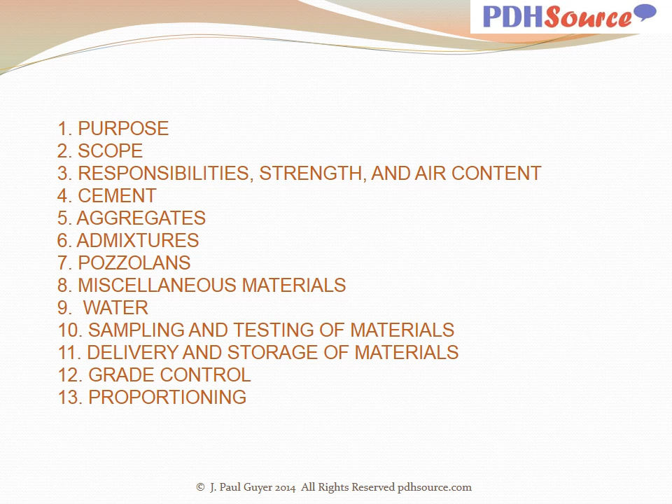11, Delivery and Storage of Materials. 12, Grade Control. 13, Proportioning. 14, Subgrade Base Forms and String Lines. 15, Batching and Mixing. 16, Placing. 17, Field Test Specimens. 18, Finishing.

19, Curing. 20, Grade and Surface Smoothness Requirements. 21, Tolerances in Pavement Thickness. 22, Repairs of Defective Pavement Slabs. 23, Joints. 24, Pavement Protection. 25, Measurements and References.

So as you can see from the table of contents, this discussion provides information on the materials and construction procedures for concrete pavements. We are talking only about concrete pavements, not concrete structures. This discussion describes the constituents to be used in concrete, procedures to be used in manufacturing the concrete, and the equipment and procedures to place, texture, and cure concrete for pavements.

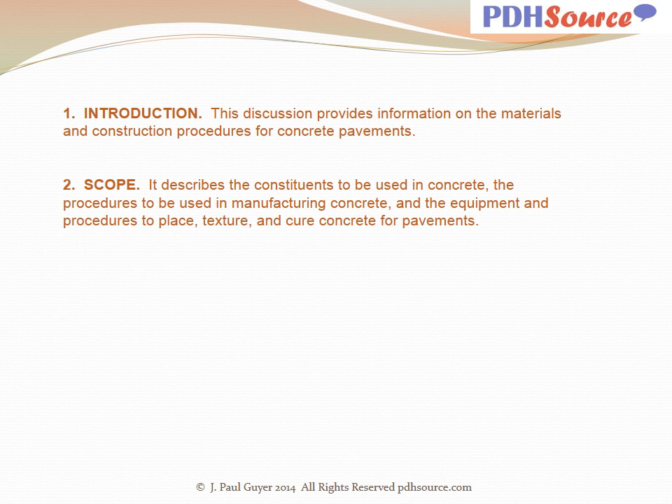Responsibilities are very important in concrete work. The strength of the concrete is, of course, dependent upon the components of the concrete, and the air content is part of the design.

The responsibility for mixture proportioning must be clearly assigned to either the contractor or what is called in this discussion the contracting officer. Now, the term contracting officer is used here to indicate the owner's agent on the project, speaking for the owner.

And in the real world, he may have other names such as project engineer, field engineer, inspector, etc. In this discussion, the term contracting officer is used to mean the owner's representative on the project, and that's how he would be referred to in the contract documents.

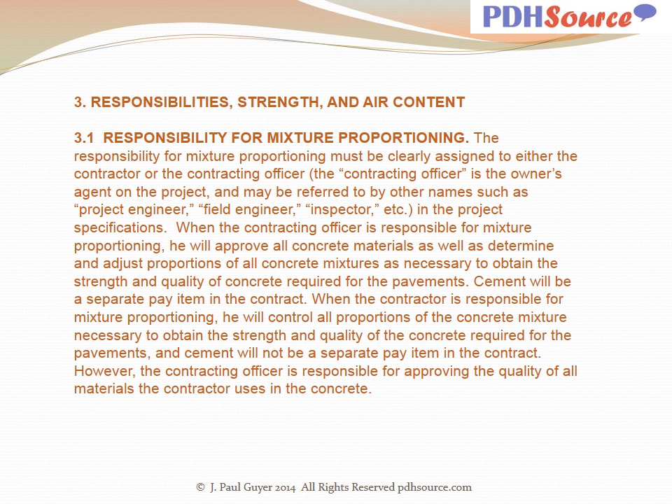The contractor, as part of the approval process, must submit proposed mixtures if he is responsible for mixture proportioning, samples of all materials, and detailed descriptions of all plant, construction equipment, and proposed construction procedures prior to the start of construction.

Flexural strength of the concrete is critically important. Structural designs are based on flexural strengths that the concrete is expected to obtain at typically 28 days for road and highway pavements and 90 days for airfield pavements.

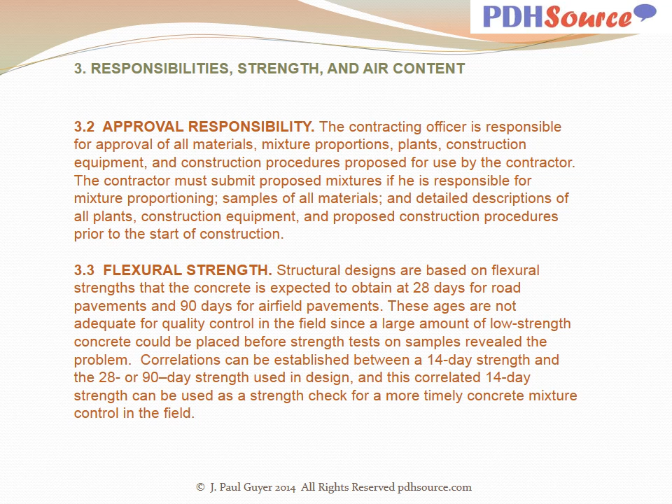These ages are not adequate for quality control in the field, since a large amount of low-strength concrete could be placed before strength tests on samples revealed the problem. Correlations can be established between a 14-day strength and the 28 or 90-day strength used in the design, and this correlated 14-day strength can be used as a strength check for more timely concrete mixture control in the field.

Materials and flexural strength are critical items in the concrete. To select suitable flexural strengths for the design of pavements and for inclusion in contract specifications, the contracting officer should have reliable information regarding flexural strengths obtainable with acceptable concrete materials which are available in the vicinity of the project, and the availability of materials in the vicinity of a project is an important consideration.

Typical design values for flexural strength of paving quality concrete vary from 500 to 750 pounds per square inch. Numerous tests indicate considerable variation in the flexural strength of concrete when different aggregates or different cements are used. There are some indications that aggregate shape and modulus of elasticity are relatively more important in concrete flexural strength than in compressive strength. Also, after optimum flexural strength is reached, there usually is little increase in strength, even with a large increase in cement content.

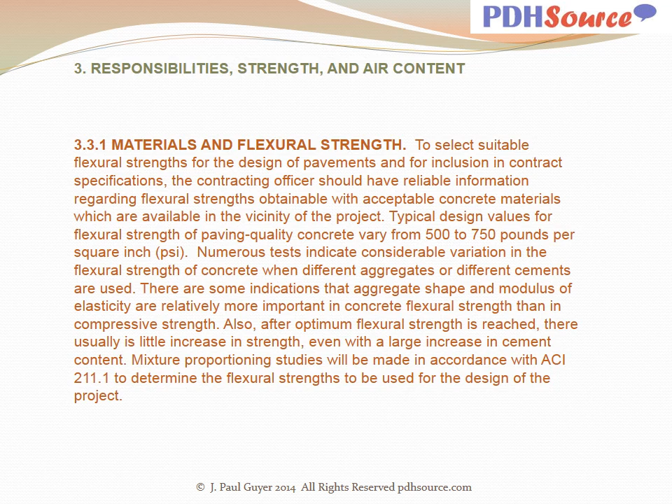The water-cement ratio, strength relations for mixture proportioning in ACI 211.1 are given in terms of compressive strength. Table 1 gives some approximate guidance for relating the concrete modulus of rupture to the compressive strength water-cement ratio relationships given in ACI 211.1.

All aggregates, cementitious materials, and admixtures used in the mixture proportioning studies shall be representative of materials available for use in pavement construction. In selecting a flexural strength for pavement design, suitable allowances will be made for variations in strength indicated by tests of different combinations of aggregate and cement. Pavement design will be based on a realistic and economical strength obtainable with available materials.

Table 1 provides a picture of the approximate relationship between water-cement ratio and strengths of concrete, modified from ACI 211.1. As an example, at 28 days, a compressive strength of 6,000 psi gives an approximate range of modulus of rupture of 700 to 800 psi, while a compressive strength of 2,000 psi gives an approximate range of modulus of rupture of 350 to 450 psi, with the water-cement ratios for air-entrained and non-air-entrained concrete indicated in the last two columns.

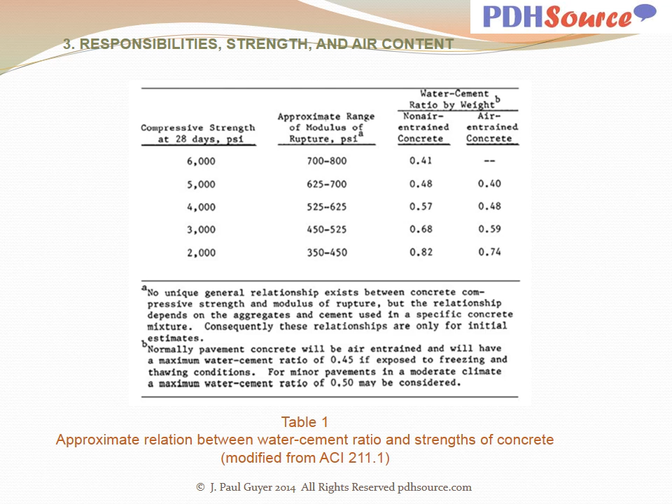Selection of a field control strength is important. Once a mixture proportion is selected to provide the required design flexural strength at 28 or 90 days and a correlated 14-day strength is developed from laboratory testing, a field control strength is selected such that 80% of the consecutive 14-day flexural strength test results fall above it.

The 14-day field control strength is determined from the formula F sub FC, field control, equals F correlated minus 0.84 SD. F sub FC is the 14-day field control flexural strength. F correlated is the 14-day flexural strength that is correlated with the required 28 or 90-day strength. And SD is the standard deviation of flexural strength results.

If sufficient test results are not available to establish a reasonable standard deviation in the mixture, the coefficient of variation, that is the standard deviation of the mixture flexural strength divided by the mean mixture flexural strength, may be estimated as 10% for large projects with good quality control and 15 to 20% for smaller jobs or jobs with relatively poor quality control.

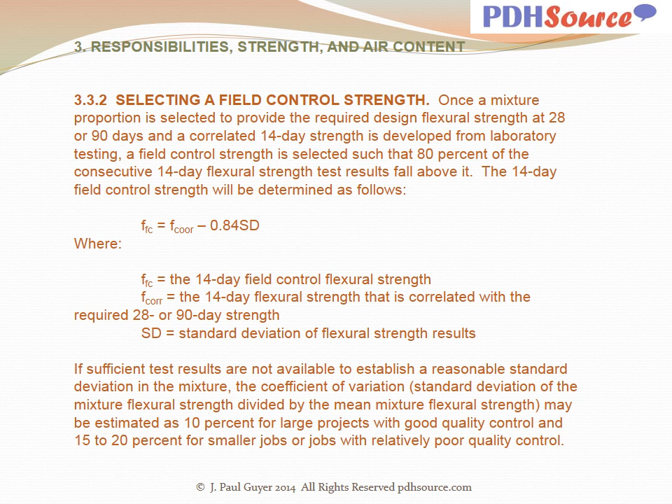Test specimens are an important tool in the concrete pavement construction process. Flexural strength tests should be made on molded beam specimens with 6-inch by 6-inch cross-sectional dimensions in accordance with ASTM C78. Standardization of the test specimen is necessary because of the variations in flexural strength obtained with specimens of different sizes. The 6-inch by 6-inch molded beam specimen must be used for all flexural strength determinations in both the laboratory and the field.

Air content is, of course, one of the components of concrete. The effects of air entrainment must be taken into consideration. Air-entrained concrete is required for all concrete pavements. Air entrainment improves the workability and placing characteristics of freshly mixed concrete and is required for the freezing and thawing resistance of hardened concrete.

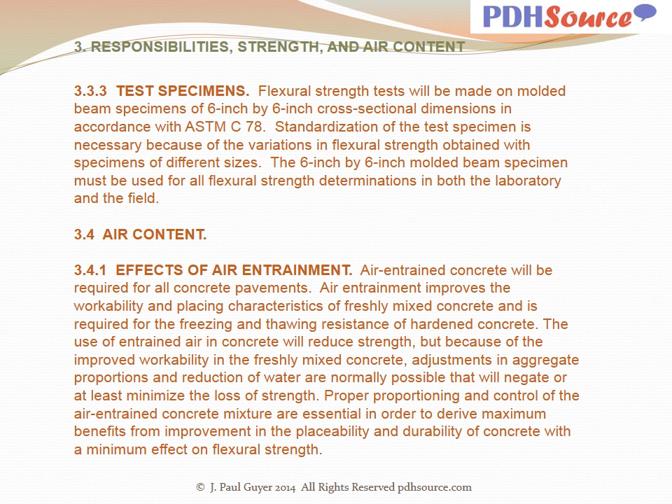The percentage of air content is of importance in the concrete pavement construction process. The specified air content shall be 6 plus or minus 1.5% for concrete pavements located in regions where resistance to freezing and thawing is a prime consideration, and will be 5 plus or minus 1.5% for concrete pavements located in regions where frost action is not a factor and air entrainment is used primarily to improve the workability and placeability of freshly mixed concrete.

Air content must be controlled in the field at the point within the specified range most appropriate for local conditions depending upon the severity of exposure and the quality and maximum size of aggregate. If slag aggregate is used, the air content shall be determined by the volumetric method described in ASTM C173.

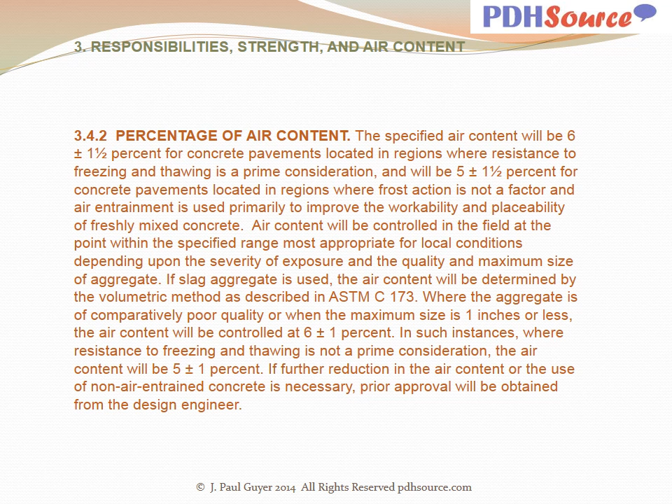Cement content in the concrete is, of course, essential. Either the contractor or the contracting officer may be responsible, in accordance with the contract documents, for mixture proportioning.

When the contractor is responsible for mixture proportioning, no separate payment will be made for cement. When the contracting officer is responsible for mixture proportioning, no limits for the quantity of cement content will be included in the contract specifications. The quantity of cement used per cubic yard of concrete will be determined by the contracting officer, and the cement will be paid for under a separate unit cost bid item.

When the concrete proposed for use on a paving project has a cement content of less than 470 pounds per cubic yard, prior approval must be obtained from the design engineer. When concrete proportioning is the responsibility of the contractor and the cement content is less than 470 pounds per cubic yard, the results shall be verified by 2 commercial laboratories prior to submittal.

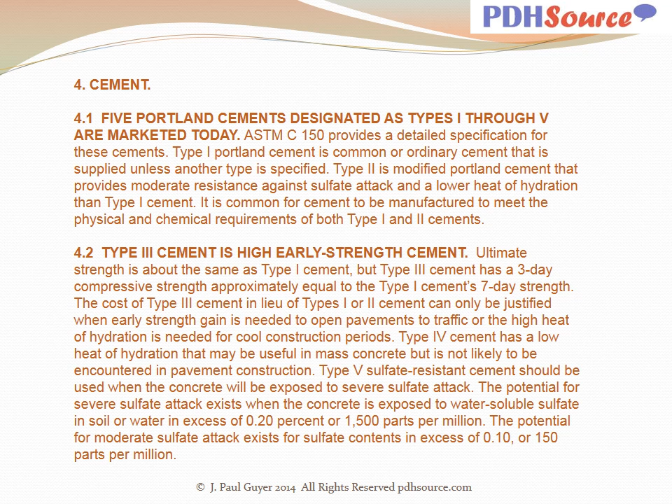Type 4 cement has a low heat of hydration that may be useful in mass concrete, but is not likely to be encountered in pavement construction. Type 5 sulfate resistant cement should be used when the concrete will be exposed to severe sulfate attack. The potential for severe sulfate attack exists when the concrete is exposed to water-soluble sulfate in soil or in water in excess of 0.2% or 1,500 parts per million. The potential for moderate sulfate attack exists for sulfate contents in excess of 0.1% or 150 parts per million.

High alumina cement, known as aluminous or calcium aluminate cement, gains most of its strength in 1 day, has a high exotherm, is resistant to chemical attack, and is a refractory material. When exposed to warm, moist conditions, it will undergo a long-term strength loss. High alumina cement may find some specialized applications in pavement construction where its rapid strength gain, high exotherm, or refractory properties will outweigh its cost and long-term strength loss.

There are also expansive cements designated as types K, M, and S in ASTM C845 that may find some application where concrete shrinkage needs to be minimized or avoided. However, there is little experience with these cements, and they will require careful investigation before use in pavement construction.

At least one United States manufacturer is actively promoting a slag cement made by grinding iron blast furnace slag. This may be substituted for up to 50% of the Portland cement in a pavement mixture if tests show the required final properties are achieved in the hardened concrete. Pre-blended mixes of Portland and Pozzolan, type IP, and Portland slag cements, type IS, are described in ASTM C595 and are acceptable for use in pavements.

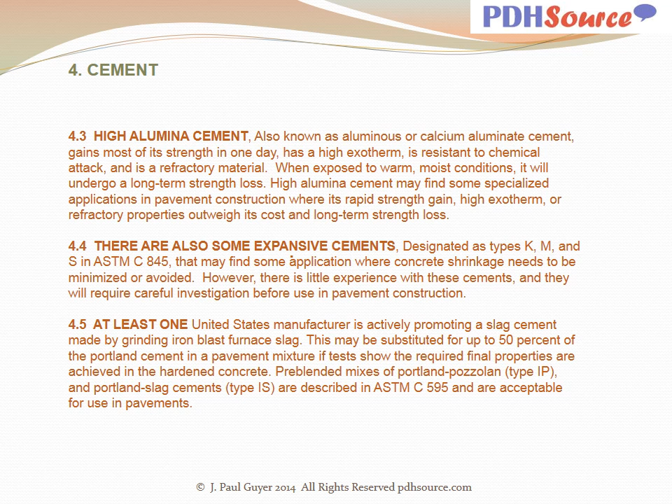The contractor will be required to use aggregates from approved sources. If the contractor proposes to use aggregates from an unapproved source, the contracting officer will be responsible for conducting tests to determine whether the proposed aggregates will meet the requirements of the project. Sampling and aggregate delivery costs will be borne by the contractor. The contract specifications will state aggregate sample size, delivery location, and required evaluation time for the proposed aggregates.

For small jobs requiring 1,600 cubic yards or less of concrete, all tests for aggregates from an unapproved source will be done by the contractor. Aggregates must generally meet the requirements of ASTM C33. These requirements can be adjusted as necessary to reflect local experience with specific aggregates to ensure economical use of aggregates to meet project requirements.

The magnesium sulfate soundness test, ASTM C88, required in ASTM C33, has not been consistently successful in identifying frost-resistant aggregate. Consequently, if an otherwise suitable aggregate fails this test, it should be further investigated using freezing and thawing tests as described in ASTM C666 or ASTM C682 before it is finally rejected.

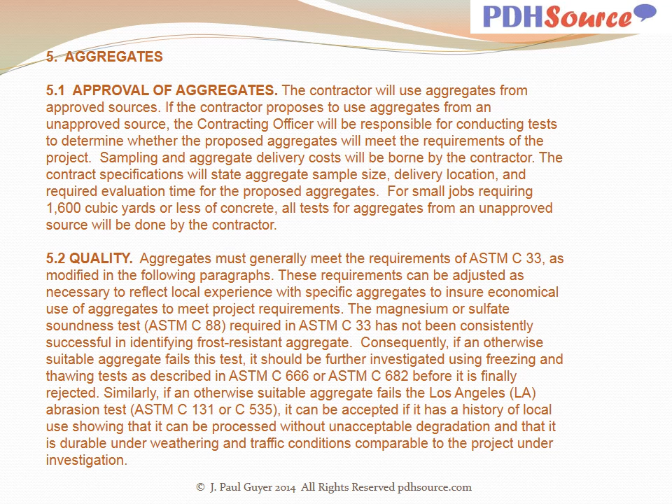Recycled concrete may, in appropriate circumstances, be used as aggregate. Existing concrete may be taken up, crushed to suitable gradation, and reused as concrete aggregate. It must meet all the requirements for gradation and quality that conventional aggregates must meet. All reinforcing steel should be removed.

During crushing, hammer mill secondary crushers tend to produce excess fines and should not be used. The recycled concrete aggregates will not normally require washing unless they have been contaminated with base or subgrade material. If the original pavement that is being recycled is D-cracked, then the concrete should be crushed to a maximum size of 3/4 inch. When crushed concrete is being used as fine aggregate, the inclusion of some natural sand may be required to improve the concrete mixture's workability.

Minerals in some aggregates can chemically react with the cement alkalis, resulting in an increase in volume that places the concrete under expansive stresses, which may result in map cracking, pop-outs, strength loss, and concrete expansion. Once started, the reaction and the resulting progressive deterioration of the concrete cannot be stopped.

These reactions are generally associated with aggregates containing poorly ordered forms of silica such as opal, chalcedony, chert, or flint, known as alkali silica reactions. Complex layer lattice and silicate minerals such as graywacke, phyllites, siltstones, or argillites are sometimes differentiated as alkali silicate reaction, or argillaceous dolomitic limestone, alkali carbonate reaction.

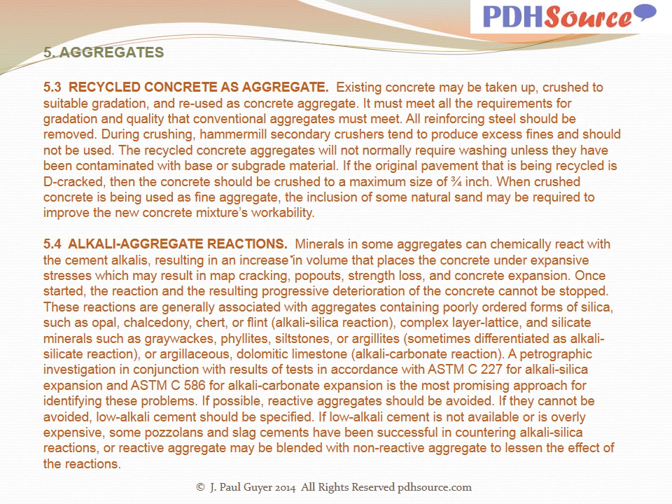Some discussion of coarse aggregate is appropriate. The composition of coarse aggregate may be natural gravel, crushed stone, crushed recycled concrete, or iron blast furnace slag. The crushing of gravel tends to improve the quality and the bond characteristics and generally results in a higher flexural strength of concrete than if uncrushed gravel is used.

When mixture proportioning studies or local experience indicates that a low flexural strength will be obtained with uncrushed gravel, the possibility of obtaining higher strength by crushing the gravel will be investigated.

Elongated particles with a width to thickness ratio in excess of 3 may not exceed 20% by weight. This requirement attempts to avoid introducing structural planes of weakness in the finished concrete, workability problems associated with an excess of particles of these shapes, and durability problems that may develop if air and water are trapped under flat and elongated particles.

The maximum size of the coarse aggregate used in pavement concrete should not exceed 1/4 of the pavement thickness. In no case should the coarse aggregate exceed a 2-inch maximum size. For pavement construction in areas where aggregate pop-outs have been a problem or may occur, the coarse aggregate will not exceed 1.5-inch nominal maximum size.

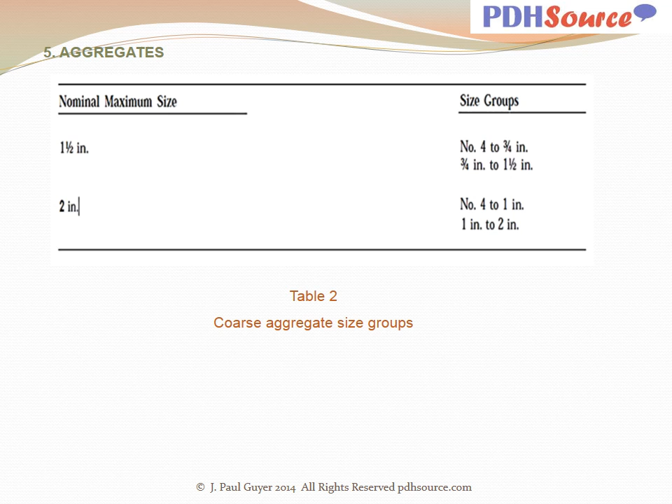Table 2 indicates the coarse aggregate size groups. Table 3 indicates the grading of coarse aggregate.

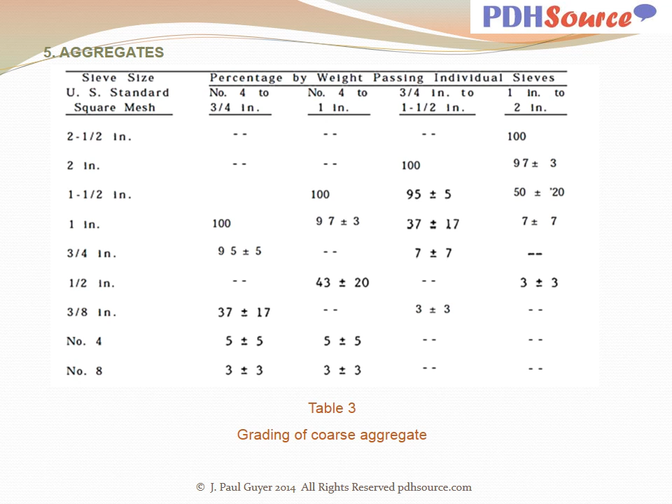Deleterious substances in aggregates can be an issue. If the pavement is one for an airport, airfield, or landing strip, Table 4 lists common deleterious substances and specifies limits for these materials. The performance history of local aggregates contributing to pavement defects will be the determining factor in setting the limits.

The limits are intended to eliminate pop-outs and weather-outs in runways and taxiways. Other deleterious substances known to contribute to pop-outs will be identified by the contracting officer, and suitable limits will be specified. Calcium oxide and magnesium oxide, or a mixture thereof, in lumps representing the hard burned oxides from fluxing stone or refractory brick, should be added to the list of deleterious substances if air-cooled blast furnace slag is used as the aggregate. Since the types of materials producing pop-outs will vary for different areas, some adjustments of the limits may be desirable for individual projects.

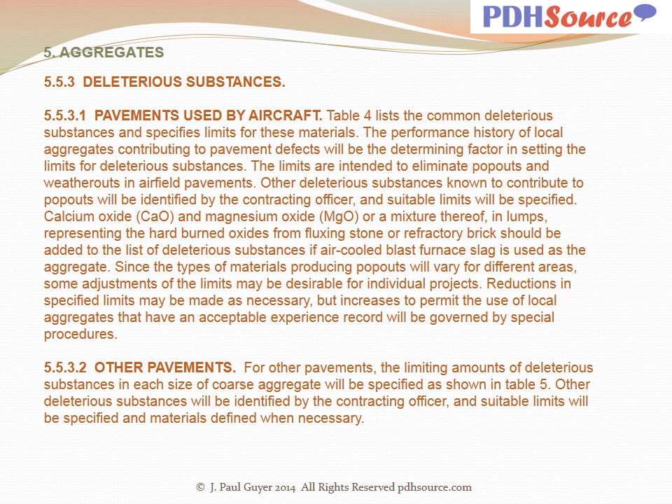Reductions in specified limits may be made as necessary, but increases to permit the use of local aggregates that have an acceptable experience record will be governed by special procedures. With other pavements, the limiting amounts of deleterious substances in each size of coarse aggregate will be as specified in Table 5. Other deleterious substances will be identified by the contracting officer, and suitable limits will be specified and materials defined when necessary.

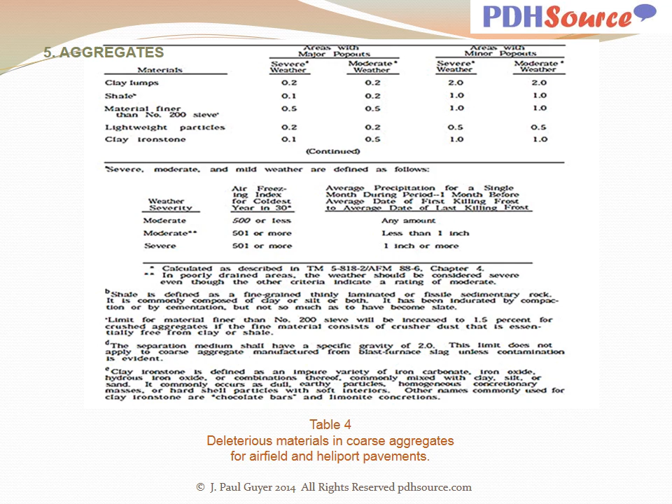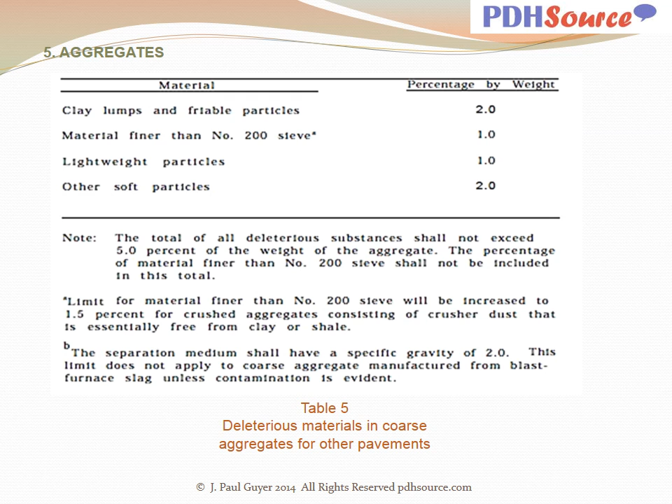Table 4 indicates deleterious materials in coarse aggregates for runways and taxiways at airfields, continued. Table 5 indicates deleterious materials in coarse aggregates for other pavements.

Slag aggregate, such as iron ore blast furnace slag aggregates, vary widely in properties depending on the manufacturing and cooling processes used. Unaged blast furnace slag may contain free lime, but aging reduces this to acceptable levels. Properly aged iron ore blast furnace aggregate has a good history of performance. Slag from steel mills, however, is not acceptable as concrete aggregate because of the various oxides it contains.

With regard to fine aggregate, requirements for composition and particle shape are purely descriptive. For example, natural and/or manufactured sand, spherical or cubical, and no limits are shown. A limit will be included for flat and elongated particles in fine aggregate comparable with the limit specified for coarse aggregates when tests indicate that poor particle shape will affect the workability and quality of the concrete.

The grading and uniformity of grading specified in Table 6 for fine aggregates are desirable for pavement concrete and can generally be met at a reasonable cost within the continental United States. However, if conformance with these requirements will result in undue construction costs, and if investigation of the available sources of fine aggregate in the locality indicates that other limits are desirable, a request should be made and submitted to the design engineer.

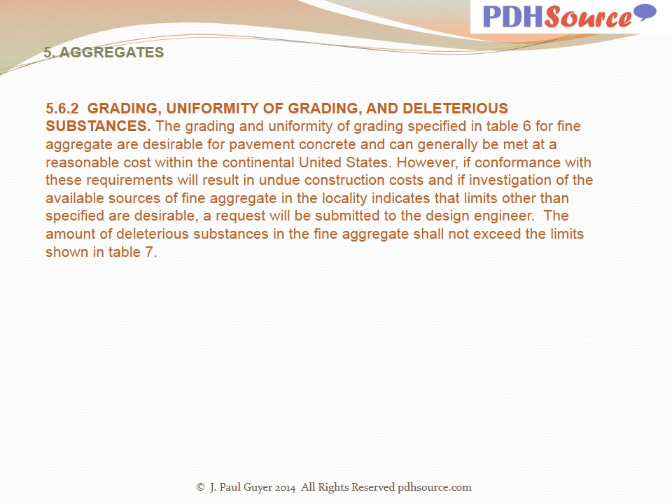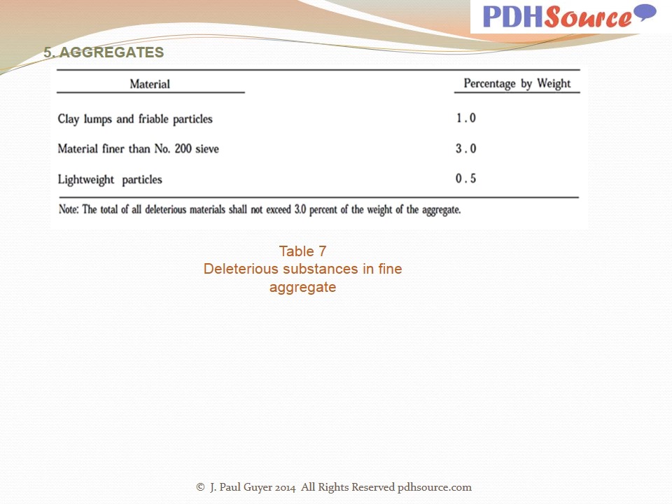To avoid inclusion in aggregate for calibration hard stand pavement concrete of iron oxides or other iron-rich materials having magnetic properties that will interfere with the operation of the facility, the concrete aggregate proposed for paving calibration hard stands will be subjected to detailed petrographic analyses in accordance with ASTM C295 prior to acceptance. Special attention will be given to the existence of magnetite in granites, high iron minerals in trap rock, pyrite in limestone, and free iron or iron oxide in slag aggregate.

When a list of aggregate sources is included in the contract specifications, the sources not approved for concrete used in calibration hard stands will be indicated.

With regard to aggregate for power check pads, concrete exposed to extended jet engine blasts during maintenance can use igneous rocks with low silica content and a high content of ferromagnesian minerals, or slag, to improve performance under high temperature. Aggregates rich in silica such as quartzite or chert should be avoided. Aggregate with a high silica content such as sandstone or granite, especially if coarse-grained, can cause problems. Calcareous aggregates such as limestone or dolomite are acceptable.

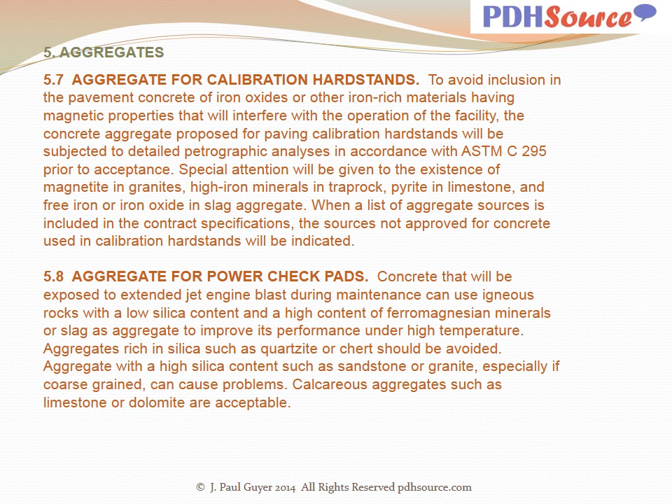With regard to admixtures, they are used to modify properties of fresh or hardened concrete. They may be used to improve workability, control initial set, reduce heat generation, accelerate strength gain, increase strength, and improve durability. Seven chemical admixtures are listed for use in Portland cement concrete in ASTM C494, as follows.

Type A, water-reducing admixture. Type B, retarding admixture. Type C, accelerating admixture. Type D, water-reducing and retarding admixture. Type E, water-reducing and accelerating admixture. Type F, water-reducing high-range admixture. And Type G, water-reducing, high-range, and retarding admixture.

With regard to air entraining admixtures, they provide resistance to freezing and thawing and should meet the requirements of ASTM C260, and will normally be required in all concrete for pavements. For small jobs under 1,600 cubic yards, air entraining cements may be considered. The use of any other admixture will depend on the economics of its use and site conditions. The effect of an admixture will vary depending upon conditions such as cement type, specific mixture proportions, ambient temperature, and water quality.

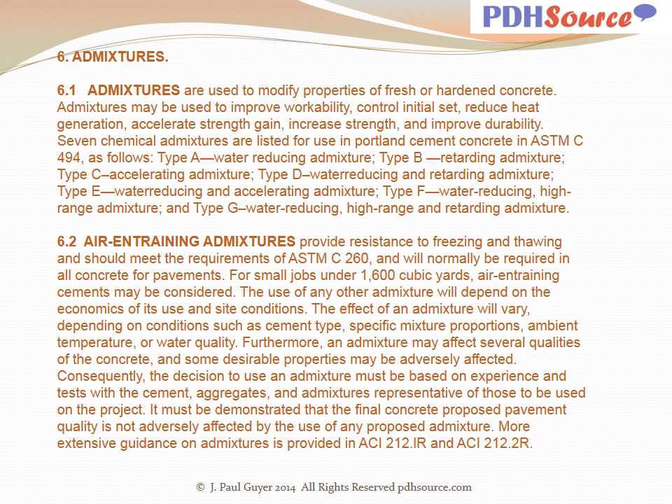Pozzolans are defined in ASTM C618 as siliceous and aluminous materials which in themselves possess little or no cementitious value, but will, in finely divided form and in the presence of moisture, chemically react with calcium hydroxide at ordinary temperatures to form compounds possessing cementitious properties. This ASTM specification recognizes 3 classes of pozzolan and provides detailed requirements for each class.

Class N pozzolans are raw or calcined natural pozzolans such as diatomaceous earths, opaline cherts, tuffs, volcanic ashes, clays, and shales. Fly ash is divided into 2 classes. Class F is fly ash produced by burning anthracite or bituminous coal, and Class C fly ash is produced by burning lignite or subbituminous coal. EPA guidelines published in 1983 require that the use of fly ash must be allowed on all federal projects unless it can be proven technically unsuitable.

Pozzolans may be substituted for a maximum of 25% by volume of Portland cement in concrete for pavements. If substitution of pozzolan above this limit is contemplated, a thorough test program must show that the proposed substitution limit will not adversely affect workability, admixture performance, strength, and durability of the final concrete.

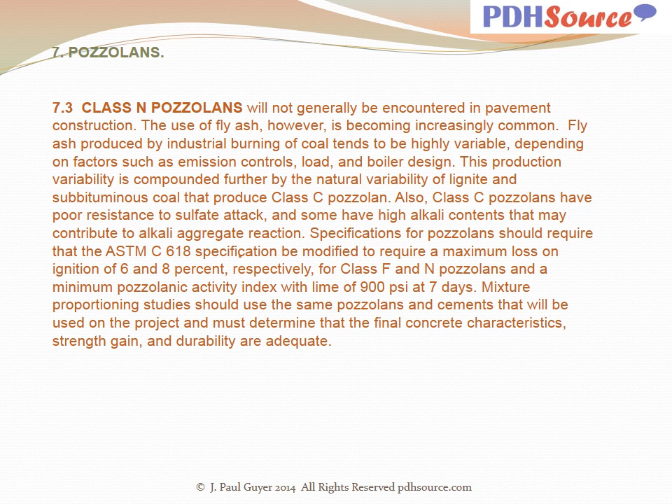With regard to miscellaneous materials, other materials used in concrete pavement construction include curing materials, dowels, tie bars, reinforcement, and expansion joint filler, and are covered by applicable specifications. When concrete is required to be free of magnetic materials, special instructions are required. Field welding of crossing bars, tack welding, is prohibited. All welded splices shall conform to the requirements of American Welding Society AWS-D1.4.

Selection of the proper welding procedure depends on the actual chemical composition of the steel. A procedure suitable for one chemical composition can be totally unsuited for another composition of the same strength grade. It's essential that the composition of the steel to be welded be determined before the welding procedure is established. Where reinforcing bars are to be ordered for new work, the fabricator should be informed that welded splices are contemplated. The fabricator can provide the chemical composition of the reinforcing bars, and in many cases can provide bars that are more suited to welding.

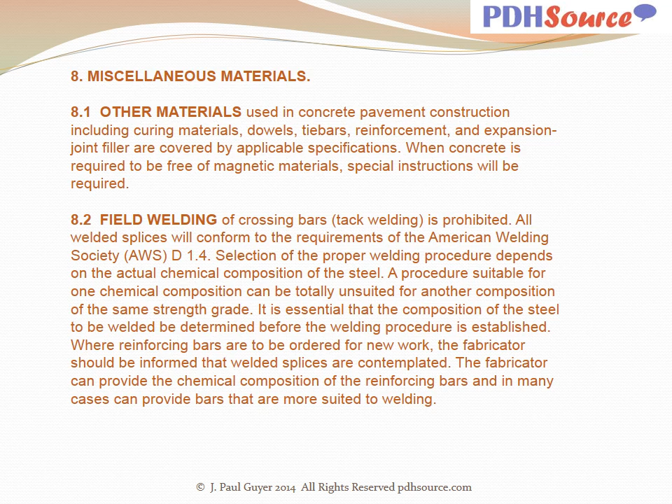Epoxy-coated reinforcing steel and dowel bars are being used more frequently in areas such as bridge decks, coastal areas, and pavements subject to heavy applications of de-icing salts to minimize potential corrosion problems. If these materials are used, they should conform to ASTM A775. Epoxy-coated dowels and reinforcing steel will rest on epoxy-coated wire bar supports or on bar supports made of dielectric material. Wire bar supports will be coated for a minimum of 2 inches from the point of contact with the epoxy-coated reinforcing bars. Adequate ventilation to dissipate fumes must be provided if epoxy-coated steel is welded.

Water for mixing concrete must be free from materials that affect hydration of the cement. Potable water may be used without testing.

Tests will be made in accordance with the appropriate standards if the water source is a stream or other body of water of unknown quality. Seawater has been used successfully as mixing water, but this should only be done if there is no feasible alternative. There may be up to a 15% loss in ultimate strength, set times may be affected, and surface efflorescence may occur. The risk of steel corrosion may be increased, so the use of coated dowels and reinforcing steel should be considered if seawater is used.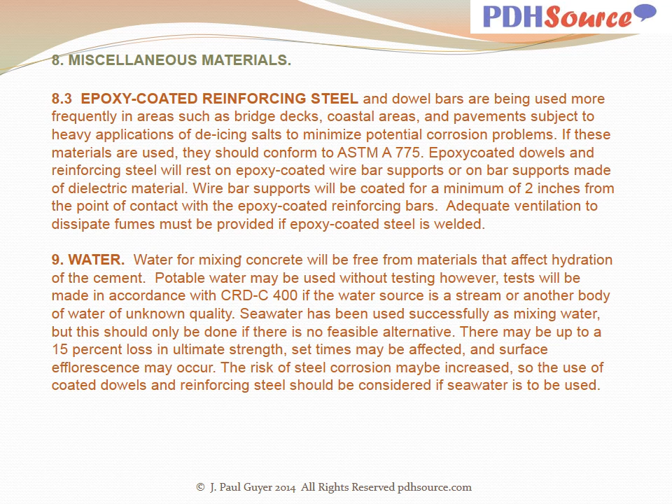The water for mixing concrete shall be free from materials that affect hydration of the cement. Potable water may be used without testing. However, tests shall be made in accordance with the appropriate standards if the water source is a stream or other body of water of unknown quality. Seawater has been successfully used as mixing water.

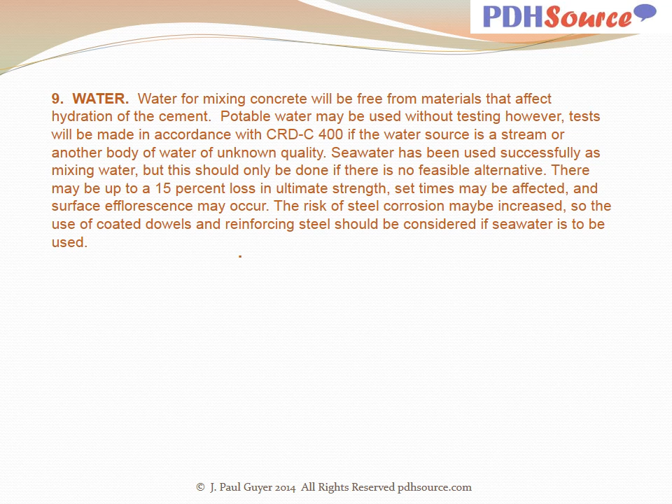With regard to aggregates and their listed sources, the listing of aggregate sources shall be based on a thorough investigation to determine that suitable aggregates are obtainable for the purpose and proposed use. Evaluation of the material will require complete laboratory testing, including petrographic examinations, physical tests, durability tests, and alkali reactivity tests. The service record of aggregates must be determined by inspecting structures that have had exposure equivalent to the proposed structure.

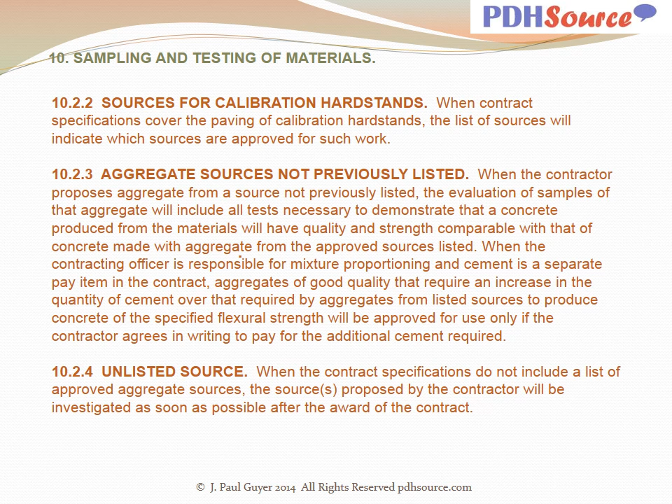When contract specifications cover the paving of calibration hard stands, the list of sources will indicate which sources are approved for such work. When the contractor proposes aggregate from a source not previously listed, the evaluation of samples of that aggregate will include all tests necessary to demonstrate that concrete produced from the materials will have quality and strength comparable with that of concrete made with aggregate from the approved sources listed.

When the contracting officer is responsible for mixture proportioning and cement is a separate pay item in the contract, aggregates of good quality that require an increase in the quantity of cement over that required by aggregates from listed sources to produce concrete of the specified flexural strength will be approved for use only if the contractor agrees in writing to pay for the additional cement required.

When the contract specifications do not include a list of approved aggregate sources, the sources proposed by the contractor will be investigated as soon as possible after the award of the contract. Evaluation of aggregates from non-listed sources and concrete mixture proportioning for projects requiring 1,600 cubic yards or less of concrete, except for airfields, will be performed by an approved commercial testing laboratory.

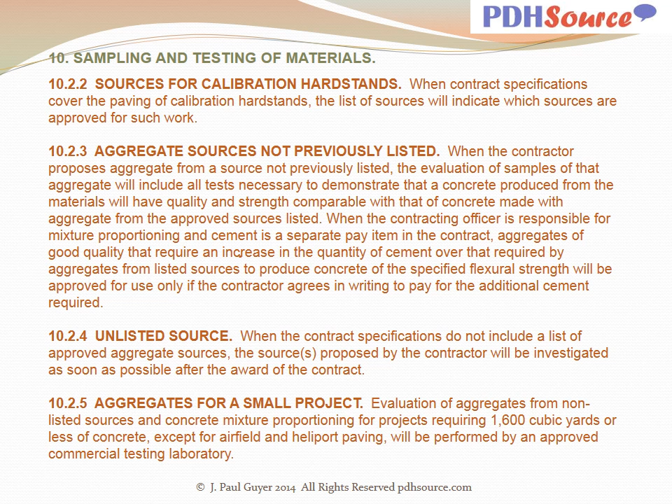Separate storage facilities must be provided for each type of cementitious material. Storage facilities will be thoroughly cleaned before changing the type of cementitious material stored in it. Storage facilities must be weather-tight and properly ventilated.

Aggregate handling and storage facilities may vary greatly for different projects, and only general requirements can be specified. Grading and uniformity of grading requirements will be determined as the aggregates are delivered to the mixer, and the contractor is responsible for meeting these requirements. Careful inspection of storage and handling operations is desirable to assure satisfactory control of aggregate grading and to prevent contamination by foreign material.

Aggregate storage techniques that use coned piles or spread truck-dumped aggregate with a bulldozer cause segregation problems. Aggregates delivered by trucks are best dumped and left in individual adjacent piles. A clamshell spreading aggregate in thin layers has also been used to minimize segregation. Aggregate should be handled as little as possible to minimize segregation. Potential sources of contaminants include wind-blown foundation and adjacent materials, and contaminants from equipment used in handling the aggregate.

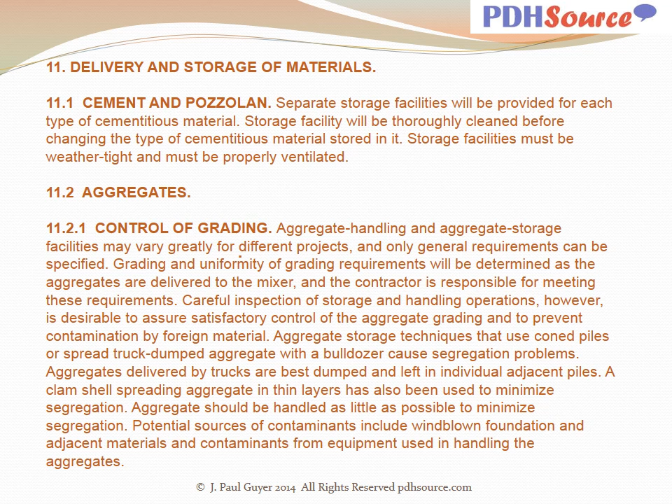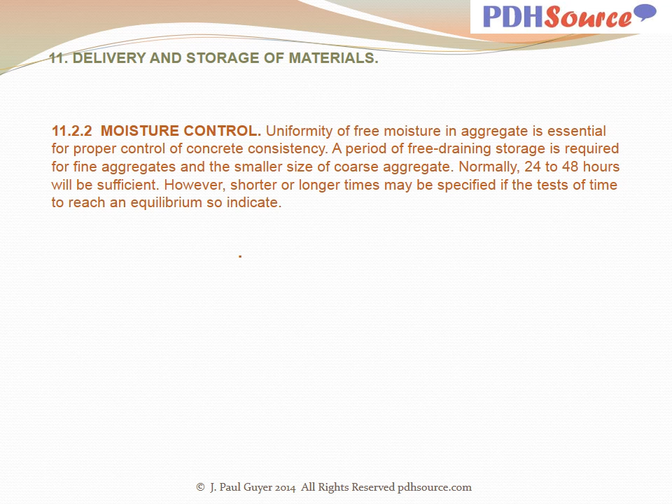Uniformity of free moisture in aggregate is essential for proper control of concrete consistency. A period of free draining storage is required for fine aggregates and the smaller size of coarse aggregate. Normally 24 to 48 hours will be sufficient; however, shorter or longer times may be specified if tests over time to reach an equilibrium so indicate.

The lines and grades shown for each pavement category of the contract shall be established and maintained by means of line and grade stakes placed at the job site by the contractor. Elevations of all benchmarks used by the contractor for controlling pavement operations at the job site will be established and maintained. The finished pavement grade lines and elevations shown shall be established and controlled at the job site in accordance with benchmark elevations furnished by the contracting officer.

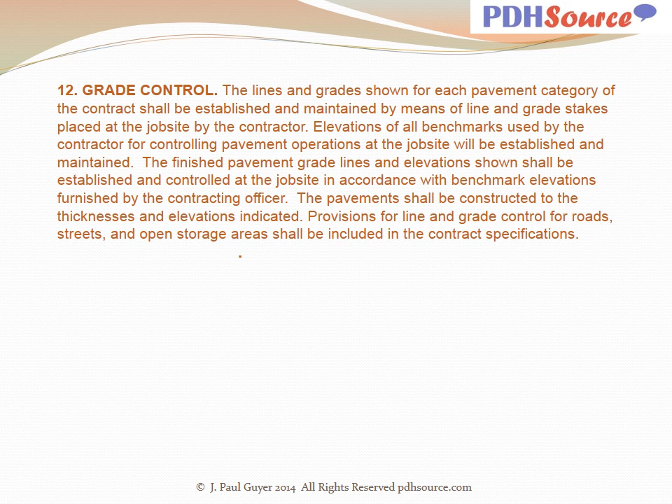The pavement shall be constructed to the thickness and elevations indicated. Provisions for line and grade control for roads, streets, and open storage areas shall be included in the contract specifications.

Before any concrete is placed, trial mixtures shall be prepared with materials from the sources to be used for production of concrete on the project. When the contractor is responsible for mixture proportioning, trial mixtures shall be prepared by a commercial testing laboratory approved by the contracting officer at no additional expense, and the results shall be submitted to the contracting officer for approval. When the contracting officer is responsible for mixture proportioning, trial mixtures will be prepared by the contracting officer with materials supplied by the contractor from the sources to be used for production of concrete on the project.

Mixtures will be made in sufficient number to establish optimum proportions of the aggregates and to represent a wide range in cement contents and water-cement ratios within specified requirements for air content and workability. The water-cement ratio will not exceed 0.45 by weight for pavement mixtures.

After the final proportions of the trial mixtures have been established, 6-inch by 6-inch cross-section test beam specimens from each mixture will be made in accordance with ASTM C192 and tested as described in ASTM C78. A minimum of 9 test specimens should be made to establish the flexural strength of each mixture at each test stage. From these mixture proportioning studies, the controlling maximum water-cement ratio and hence the cement content required to produce concrete of specified strength will be determined.

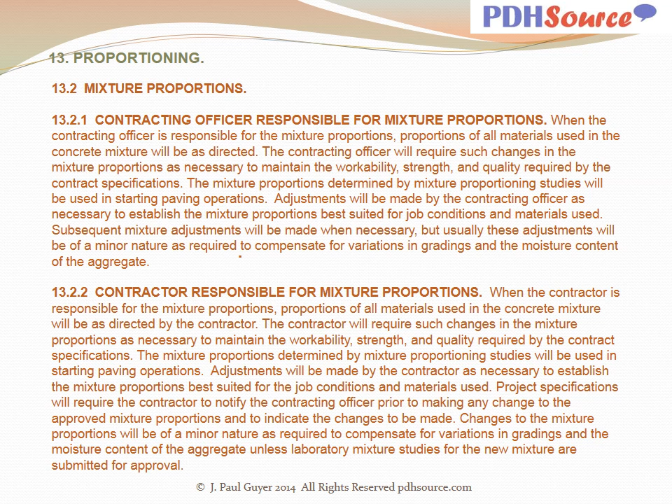The concrete slump shall not exceed 2 inches. Within this maximum limit, the slump will be maintained at the lowest practical value suitable for prevailing weather conditions and for equipment and methods used in placement of the concrete. For small paved areas, slump in excess of 2 inches may be permitted, but in no case will the slump be allowed to exceed 3 inches.

The concrete slump will be determined in the field by the method specified in ASTM C143. Slump for slip-form paving shall be specified in a range of 0 to 1¼ inches.

Control of the strength of the concrete mixtures shall be based on tests of concrete specimens taken during the paving operations. Pavements to be used by aircraft are designed on the basis of flexural strength that the concrete is expected to attain at 90 days, and specimens will be tested at this age for use in the evaluation of pavements.

Since the period necessary to obtain the 90-day field strength is too great to exercise proper control of the concrete during pavement construction, a 14-day strength requirement will be included in the contract specifications. Flexural strength tests will be made at 14 days to determine compliance with the 14-day strength requirement. In addition, 7-day strength tests will be made to provide an early indication of the concrete strength.

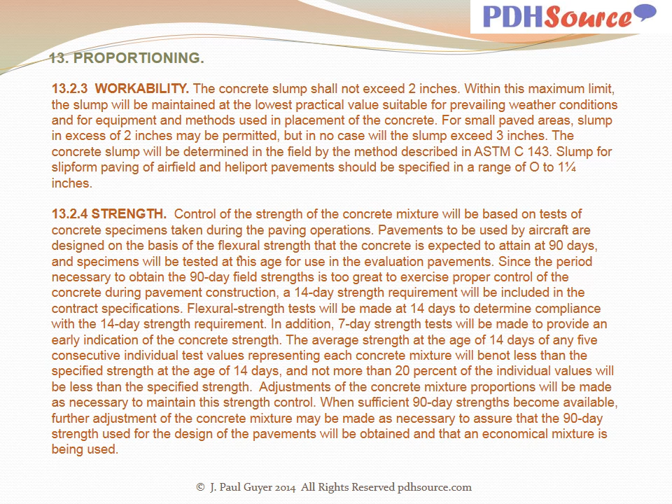Adjustments of the concrete mixture proportions will be made as necessary to maintain the strength control. When sufficient 90-day strengths become available, further adjustment of the concrete mixture may be made as necessary to assure that the 90-day strength used for the design of the pavements will be obtained and that an economical mixture is being used.

The setting and protection of forms and string lines and the final preparation of the subgrade, base course, or filter course requires close attention to all details to assure that the pavement will have the required thickness and the surface will bear the required grade.

Subgrade is the natural soil or fill upon which the base and concrete pavement are placed. Special procedures may be necessary when dealing with frost-susceptible soils, expansive soils, pumping susceptible soils, lateritic soils, or organic soils. Removing soft or troublesome soils that occur in pockets may be desirable where possible.

A base may perform many functions such as drainage, construction platform, and structural strengthening of the pavement. A base may be a granular material or lime, cement, or an asphalt stabilized material. Also, a lean concrete, sometimes referred to as econocrete, is sometimes used as a base. There is no clearly accepted definition, but cement contents are typically lower and sometimes poorer quality aggregates are used. The lean concrete base should meet the strength and durability requirements of cement stabilized materials and can be treated as a high quality stabilized material in design.

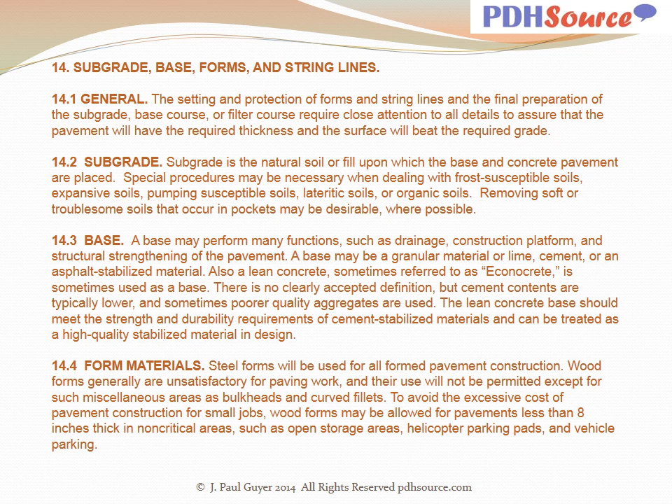To avoid the excessive cost of pavement construction for small jobs, wood forms may be allowed for pavements less than 8 inches thick in non-critical areas such as open storage areas, parking pads, and vehicle parking.

Provisions relating to built-up forms may be omitted from contract specifications when the contract plans require constant slab depth for each paved area. When this provision is retained in a contract specification, the contractor is required to furnish steel forms equal to the edge thickness of the majority of pavement slabs for each paved area.

Built-up forms will be used only where edge thicknesses exceed the basic form depth. The base width of built-up forms will be equal to the width required for a comparable full-depth form. Side forms on slip form pavers will be the full depth of the pavement.

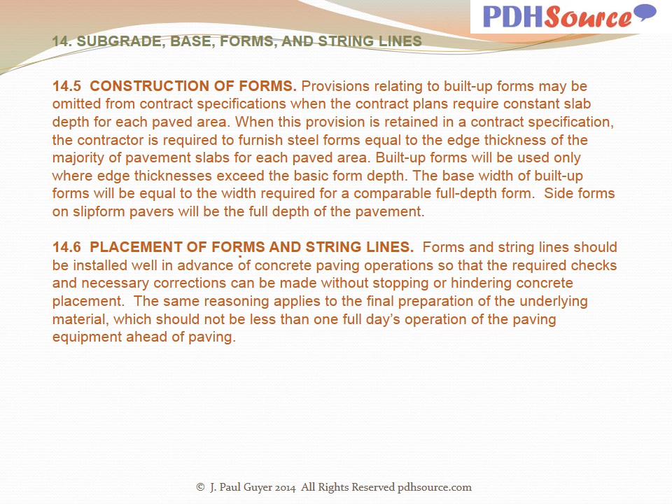Forms and string lines should be installed well in advance of concrete paving operations so that the required checks and necessary corrections can be made without stopping or hindering concrete placement. The same reasoning applies to the final preparation of the underlying material, which should not be less than 1 day's operation of the paving equipment ahead of paving.

The string line will be of high-strength cord or wire. The choice will depend on the type of automatically controlled slip-form paver used. Certain manufacturers recommend that high tensile strength wire be stretched tautly between supports. Other manufacturers recommend a large diameter cord and do not require the tautness that is recommended for the wire.

The use of wire requires firmly anchored supports. As a result, the wire is less likely to be disturbed than is the cord, whose supports do not have to be so firmly anchored. The wire is difficult to see, and flagging should be attached between the supports to reduce the chance that it will be disturbed during construction.

The cord does not require supports to be as firmly anchored as for the wire, and as a result the cord is easier to install and maintain. However, the chance of sagging between the supports is greater. The cord is easy to see, and as a result the chances of its being knocked out of alignment are less than for the wire. However, the cord is more easily disturbed than the wire and should be checked frequently.

Pavement forms generally may be removed 12 hours after the concrete is placed. A longer period will be necessary when the strength gain of the concrete is retarded because of delayed or inadequate protection during cold weather. In some instances, earlier removal of forms may be permitted so that the transverse joints may be sawed completely through to the edge of the slab without leaving a small fillet of concrete adjacent to the form.

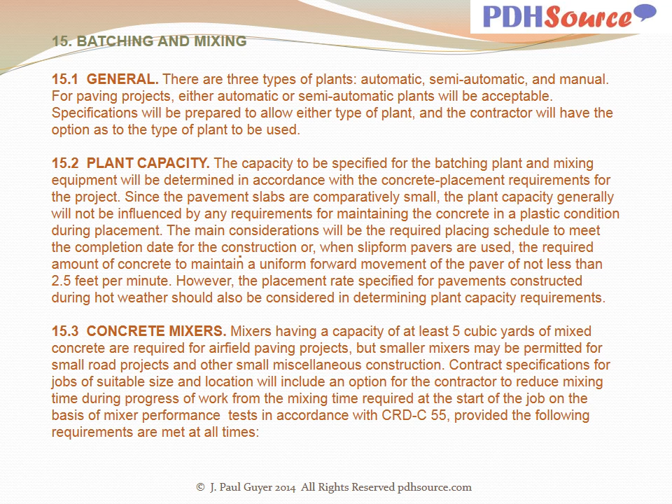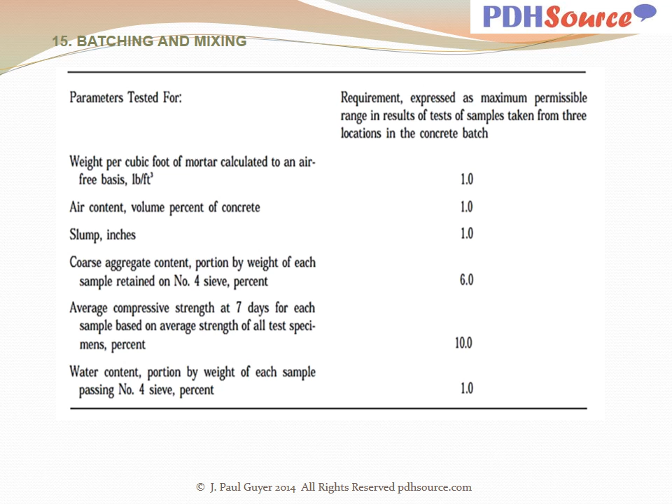In addition, no reduction in mixing time will be allowed if it results in a reduction in the 7-day flexural strength from the average strength of 5 consecutive sets of specimens made from batches mixed the full time.

The requirements for stationary mixers and truck mixers will be included unless it is determined that concrete complying with the specifications cannot be manufactured by these types of mixers. Truck mixers often have difficulty in discharging the comparatively low slump concrete mixtures required for some pavement construction. Therefore, truck mixers should comply with ASTM C94.

The tendency of the concrete to hang up in discharge chutes may cause delays, which frequently lead to requests by the contractor that the concrete slump be increased. This difficulty also may occur with vehicles used for hauling concrete to forms when stationary mixers are used. The slump of ready-mix concrete will not be increased because of the inadequacy of the mixing or transportation equipment to mix and discharge the concrete.

Before truck mixers or stationary mixers are approved for use, careful consideration must be given to the proposed plant and facilities for storage and handling of materials, and for batching, mixing, transporting, and handling of concrete at the job site to assure that adequate control of the concrete can be exercised.

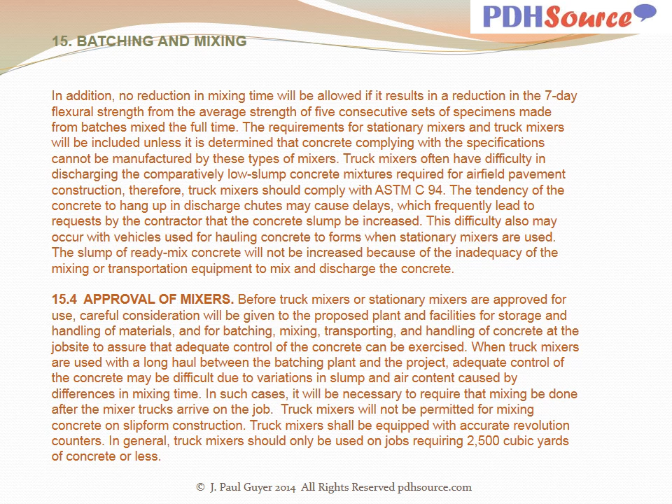Concrete may be placed between fixed forms or using approved slip form paving equipment. Both methods produce satisfactory results, and when possible, the option should be left with the contractor as to the method to be used. With slip form equipment, the rate of placement can be significantly increased over the rate with fixed forms. In addition, the material for forms and the labor for setting forms are eliminated.

As a result, the cost for large jobs will be less for slip form placement than for placement with fixed forms. However, on small jobs or larger jobs with special requirements, the use of fixed forms may be necessary or more economical than the use of slip form equipment. No guidelines can be given as to what size job will permit the economic use of slip form pavers.

Concrete will be placed before obtaining its initial set and within 45 minutes after cement has been added to the batch. These provisions apply to all paving projects regardless of the type of mixing equipment used. The addition of water to the mixture in excess of that required by the mixture proportions to maintain slump during prolonged mixing will not be permitted.

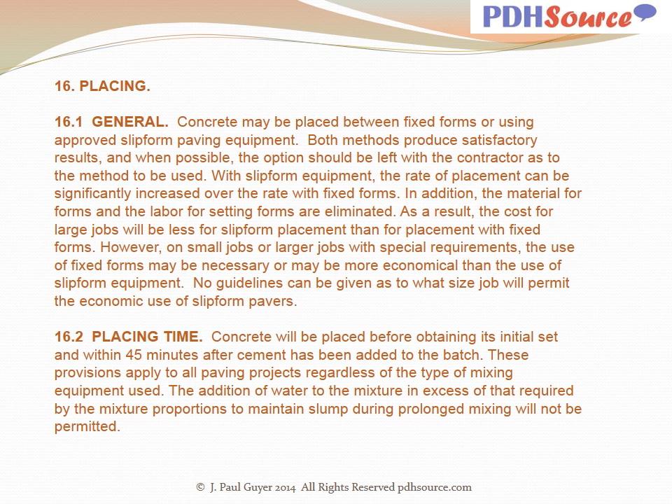Approval of the slip form paving equipment for airport and airfield pavements will be based on satisfactory performance in the field. Trial sections of sufficient length and located in low-volume aircraft traffic areas will be used to approve the paving equipment, considering both slip form and another for the fill-in operation when scheduled by the contractor. Furthermore, approval shall be based on the ability of the machine to consolidate the concrete and form the pavement to the desired cross-sections.

Plan grade and surface smoothness tolerances must be met. Particular attention should be paid to the ability of the machine to form the required edge without excessive slumping or tearing during slip form operations, and to form a suitable longitudinal construction joint during fill-in operations. The machine shall not damage the surface or edge of the previously placed slab during fill-in operations. The suggested length of the trial section is 1,000 to 2,000 feet.

Slip form pavers with a full width auger are recommended. Traveling blades have been found to be less satisfactory. If the slip formed pavement is 10 inches or greater in thickness, some of the lighter slip form pavers may have problems properly handling the low slump concrete.

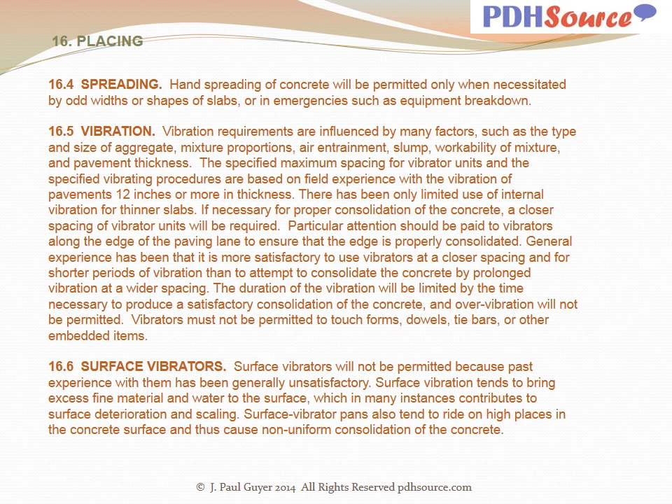Project drawings will show typical details of all slab reinforcement and will indicate the pavements requiring reinforcement and the location and amount of steel required in the slabs. This information will supplement the specification requirements for reinforcement, and all requirements will be carefully checked to ensure no discrepancies between drawings and specification requirements.

Pavement should not be placed when the air temperature is below 40 degrees Fahrenheit. If unusual job conditions require construction at these low temperatures, special provisions for placement and protection of the concrete will be needed. For additional information on winter concreting, refer to ACI 306R.

The necessary covers and other means of protecting the concrete during cold weather should be available on the job before starting concrete placement. Calcium chloride as an admixture may be either required or approved to accelerate the setting time of concrete placed during cold weather. No changes will be made in the requirements for temperature of the concrete when placing or for protection of the concrete against freezing when calcium chloride or any other accelerator is used.

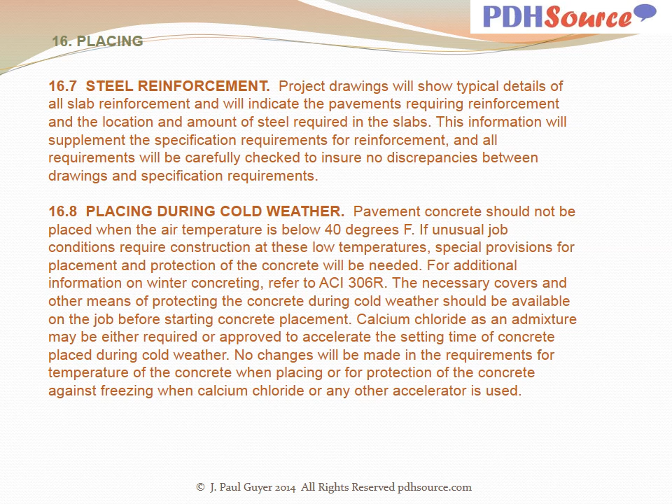During hot weather, special precautions are necessary to prevent the formation of plastic shrinkage cracks, which result from an excessive loss of moisture from the concrete before curing is begun. The concrete needs to be placed in the coolest temperature practicable, and in no case should the temperature of the concrete as placed exceed 90 degrees Fahrenheit.

Mixing and placing of concrete will be controlled to keep moisture loss at a minimum. Aggregates will be moist when added to the mixer and the subgrade dampened so it will not absorb water from the concrete. The temperature of the concrete may be reduced by using cement with a lower temperature, by sprinkling the stockpiles of aggregate to produce cooling by evaporation, by pre-cooling mixing water, and by avoiding delays in mixing and placing concrete. The concrete needs to be placed and finished as rapidly as practicable and the curing started without delay.

If the application of the curing medium should for any reason lag placement for a time sufficient to permit surface drying, the surface should be kept damp with a fog spray and placement should be discontinued until corrective action can be taken. The fog spray equipment will be capable of applying a very fine mist to the concrete to replace moisture lost by evaporation. In windy areas, screens may need to protect the concrete from rapid evaporation caused by wind.

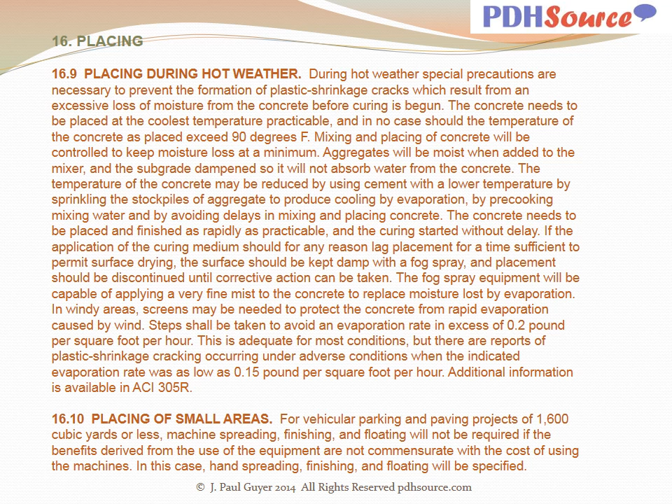Where overlay pavement construction is required, contract specifications will contain special provisions for preparation and treatment of the existing surface before placing concrete in the overlaid pavement. Criteria herein pertain to construction of rigid overlays on existing rigid pavement. Construction of rigid overlays on existing flexible pavement or on existing rigid pavement with a bond-breaking course is treated as new construction.

Overlay pavements generally are designed on the assumption that a partial bond will develop between the two concrete layers. Concrete surfaces to receive partially bonded overlays will be thoroughly cleaned of dirt and other foreign material, loose or spalled concrete, extruding joint seal, bituminous patches, and material that would break the bond between the concrete layers. Different areas of pavement will require different treatment. The condition of the existing pavement will determine the cleanup measures necessary.

Normally, sandblasting or surface abrading equipment will be required to remove material adhering to the surface, and hand scaling of loose or spalled material will be required. No special treatment such as an acid wash of the prepared surface or the use of a grout bonding course will be required for partially bonded overlays.

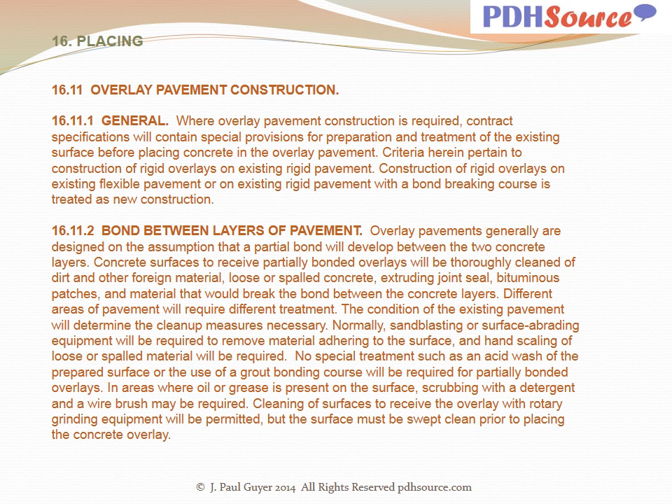Considerable difficulty has been experienced with uncontrolled cracking of overlay pavements at contraction joints. This cracking is likely to occur during hot weather when the temperature of the existing pavement is appreciably higher than that of the concrete being placed in the overlay. Contraction due to cooling of the base pavement leaves movement at the existing joint, which may start a crack in the bottom of the overlay as the concrete hardens.

This cracking may occur when the concrete is too green to saw. Often the crack is not visible at the surface of the pavement when the sawing is done. To prevent such cracking, it may be necessary to use inserts in the plastic concrete to form contraction joints.

Occasional problems have developed when relatively thin concrete pavement has been placed directly on lean concrete bases or stabilized bases with high cement contents. Uncontrolled contraction cracks in the base material have on occasion reflected through the new pavement. If a thin pavement is less than 9 inches thick and is to be placed directly on a cement stabilized or lean concrete base, it may be desirable to either place a bond breaking material between the pavement and base or to saw cut contraction joints in the base to match those in the pavement surface.

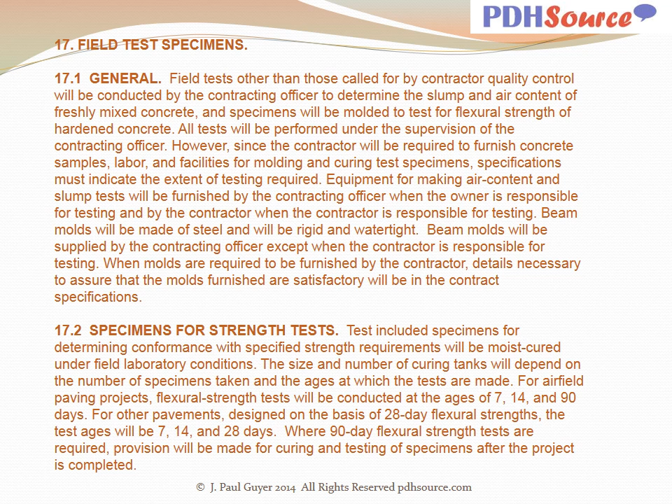Ordinarily, no field-cured specimens will be required. However, for cold weather construction, when field strength data may be necessary to permit the opening of the pavement or portions thereof to construction traffic prior to 14 days, test groups of at least 3 beams shall be taken as required from concrete placed in designated areas. The beams of each test group shall be made from a single batch of concrete and shall be cured in accordance with ASTM C31.

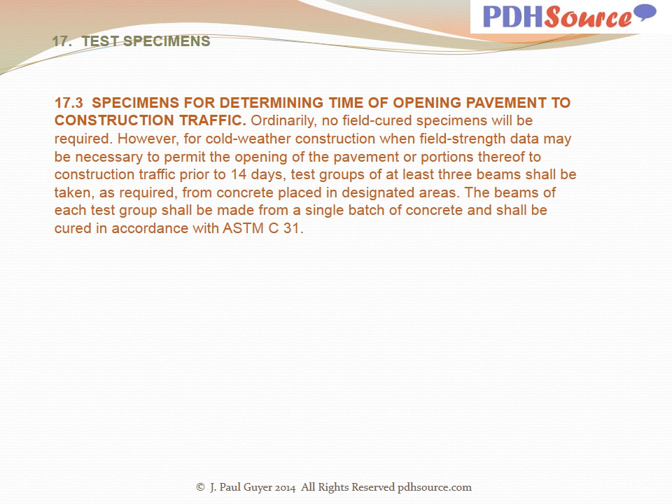With regard to finishing equipment and methods, types of finishing equipment other than conventional equipment may be used on a trial basis when capable of finishing concrete of the quality and consistency required. Equipment that fails under trial to perform in a satisfactory manner will be rejected and removed from the work area. Finishing operations are designed to obtain a dense, smooth surface true to the required grade.

Since the surface receives the greatest exposure to weathering and traffic, every precaution will be taken to obtain a high-quality concrete at the surface. The finishing operations will be kept to the minimum necessary to obtain the required surface finish. Excessive surface manipulation will not be permitted because it tends to bring a surplus of mortar, water, and undesirable soft materials to the surface, which contributes to scaling and surface deterioration.

Finishing should leave the surface at the proper grade. If the mechanical finishing operations are properly controlled, very little hand finishing will be necessary. Short floats will be used only as necessary to correct local surface unevenness. Straight edges of the required length will be used primarily to smooth and check the surface. To avoid later costly corrections of hardened pavement which fails to conform with specified surface tolerances, the surface will be thoroughly checked during the mechanical floating and necessary corrections will be made.

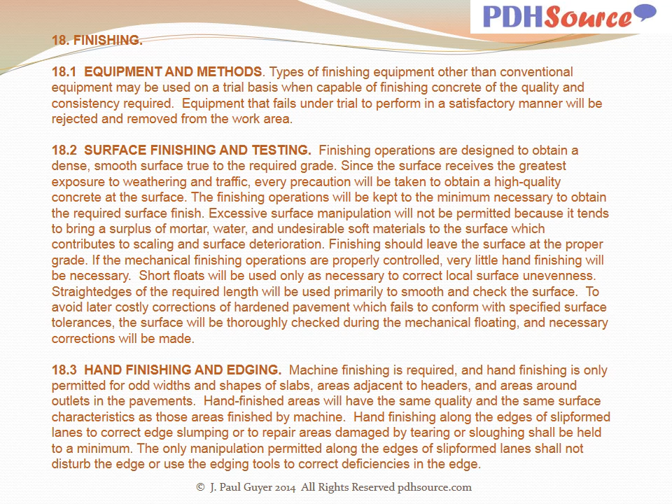Machine finishing is required, and hand finishing is only permitted for odd widths and shapes of slabs, areas adjacent to headers, and areas around outlets in the pavements. Hand-finished areas will have the same quality and the same surface characteristics as those areas finished by machine. Hand finishing along the edges of slip-formed lanes to correct edge slumping or to repair areas damaged by tearing or sloughing shall be held to a minimum. The only manipulation permitted along the edges of slip-formed lanes shall not disturb the edge or use the edging tools to correct deficiencies in the edge.

With regard to surface texture, the final surface texture of the pavement will be provided by means of a burlap drag, broom, artificial turf, wire comb, or grooving. Dragging the surface of the concrete in the direction of concrete placement with moist burlap leaves a fine sandy surface that is adequate for low-speed traffic. At least 2 feet of burlap must be in contact with the concrete, and the burlap shall be cleaned as necessary. An improved skid-resistant surface can be produced with a broom consisting of multiple rows of stiff bristles capable of producing serrations 1/16 to 1/8 of an inch deep.

The brooms will have to be cleaned frequently during texturing. Artificial turf has been used successfully for texturing concrete, applied in the same manner as burlap, with at least 2 feet of the artificial turf in contact with the concrete. One artificial turf that has provided a satisfactory texture consisted of 7,200 polyethylene turf blades, approximately 0.85 inches long per square foot.

The wire comb provides the most skid-resistant texture of the finishing techniques described so far. However, it is also the most difficult to use, and adjustments to the concrete proportions may have to be made to find a mixture that can be wire combed without objectionable surface tearing. The wire comb should consist of flexible spring steel lines spaced not less than 1/2 inch nor more than 1 inch apart. Closer spacing causes problems with raveling, and wider spacing results in objectionable road noise. The serrations left by the steel lines should be about 1/8 to 1/4 inch deep and 1/16 to 1/8 inch wide. A single pass of burlap or artificial turf can be made before the wire comb if desired.

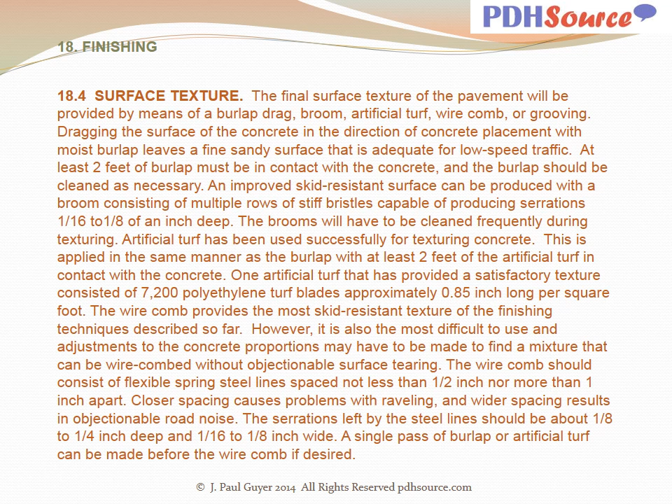With regard to curing and the control of cracking, plastic shrinkage cracking is caused by a combination of: 1. High ambient air temperature, 2. High concrete temperature, 3. Low relative humidity, and 4. Wind velocity. These conditions need to be controlled when placing and protecting young concrete.

It is essential that concrete be protected against the loss of moisture and rapid temperature change for the specified period of protection. All equipment, material, and supplies for adequate curing and protection of the concrete must be on hand and ready to install before actual concrete placement begins. In general, curing will be accomplished by using a pigmented membrane curing compound. However, other methods may be specified if indicated by local conditions.

With regard to membrane curing, the curing compound will be applied by means of a power-driven machine straddling the newly paved lane and operated so that the spray will cover the pavement surface completely and uniformly. Spray nozzles must be surrounded by a hood to prevent wind from blowing the curing compound spray. The rate of advancing and spacing of nozzles of the spraying machine will be controlled so that a two-coat overlapping coverage will be provided. Hand-operated pressure sprayers will be permitted only on indicated odd widths and shapes of slabs and on concrete surfaces exposed by removal of forms.

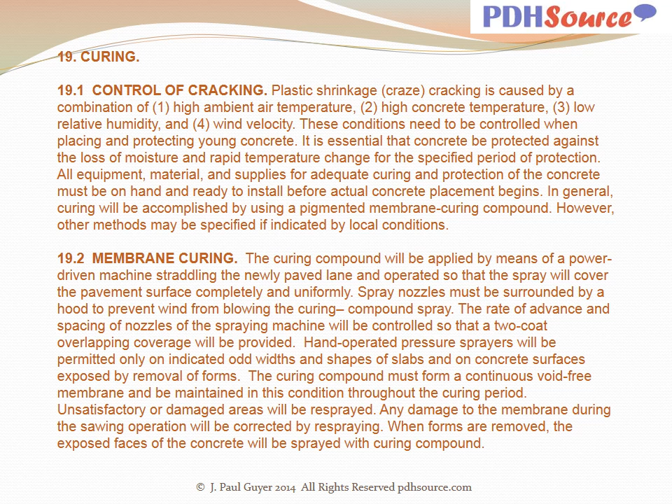Where it has been established from past experience in an area that membrane curing alone does not adequately protect pavement from shrinkage cracking, a combination of moist curing and membrane curing may be specified.

In selecting curing material for pavement surfaces to be painted, consideration shall be given to the necessity of sandblasting to remove coatings and deposits that interfere with the bonding of paint. Curing compounds of the low melting point wax-based type tend to penetrate concrete and should not be used in areas to be painted.

With regard to grading and surface smoothness requirements, first as to pavements for airfields, runways, taxiways, and heliports: the specified grade and smoothness requirements applicable to airfield and heliport pavements are shown in Table 8. The finished surfaces of airfield and heliport pavements shall have no abrupt change of 1/8 inch or more and shall not deviate from the testing edge of an approved 12-foot straight edge more than the tolerance shown in Table 8.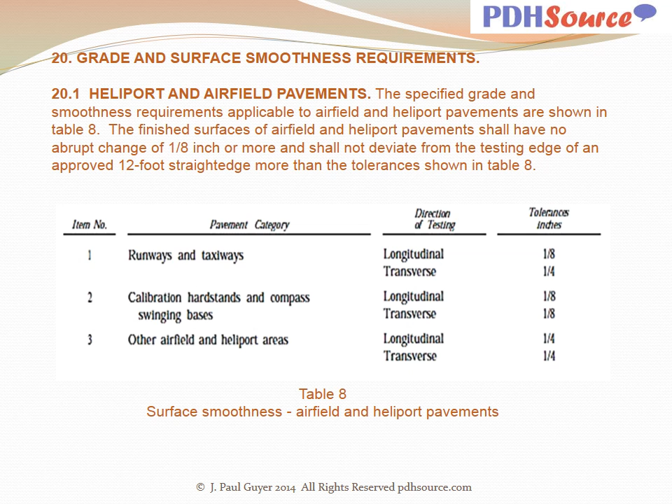For road, street, and open storage concrete pavements, pavements shall be smooth and true to grade and cross-section. When tested with a 10-foot straight edge on lines 5 feet apart, parallel with the center line of the pavement, the surface shall not vary more than 1/8 inch from the testing edge of the straight edge.

With regard to requirements for other vehicular or parking pavements: parking areas, motor pools, motor storage areas, repair yards, and open storage area pavements shall be smooth and true to grade and cross-section. When tested with a 10-foot straight edge on lines 5 feet apart, parallel with and at right angles to the center line of the paved area, the surface shall vary not more than 1/4 inch from the testing edge of the straight edge.

With regard to slip form paving, edge slump is the downward movement of the plastic concrete that occurs when the sliding form passes. Excessive slump is indicative of improper concrete mixture proportioning. If the concrete mixture cannot be redesigned to overcome the edge slump problem, fixed form paving shall be used.

When slip form paving is used, 85% of the pavement will not have an edge slump exceeding 1/4 inch, and 100% of the pavement will not have an edge slump exceeding 3/8 inch. The area of pavement affected by this slump will be limited to the outer 18 inches adjacent to the slab edge.

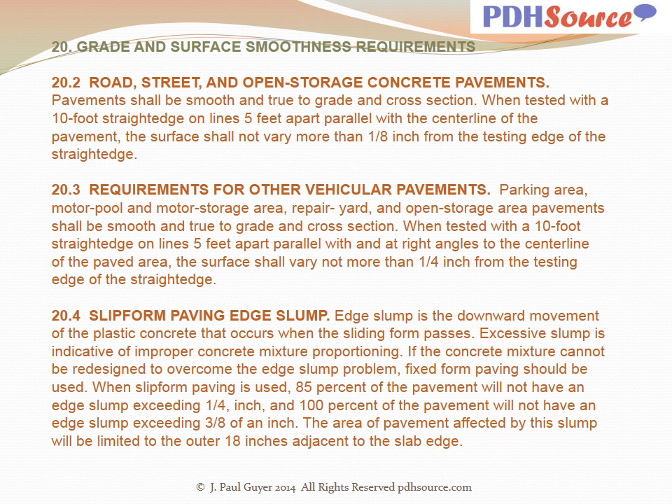With regard to tolerances in pavement thickness, pavement will be constructed to thicknesses indicated, and thickness will be checked by measurements of cores drilled from the pavement as required by the contracting officers. Cores generally will be taken at intervals of 2,000 feet or a fraction thereof from each pavement lane of paved area where lanes are 1,000 feet or more in length, and from every other lane where lanes are less than 1,000 feet in length.

Additional core drilling to determine the extent of a pavement area deficient in thickness will be included in the contract specification. Cores for checking pavement thickness will have a diameter of no less than 4 inches. When cores are used for compressive strength or splitting tensile strength tests per ASTM C496, as well as for checking pavement thickness, a 6-inch diameter core shall be drilled. Drilling and measurement of cores for checking pavement thickness will be done as directed.

Costs of drilling and testing additional cores requested by the contractor will be borne by the contractor. When the contractor is required to cut cores to check pavement thickness, additional core drilling requirements will be included in the contract specification. All core measurements will be made by the contracting officer, and the cores will become the owner's property.

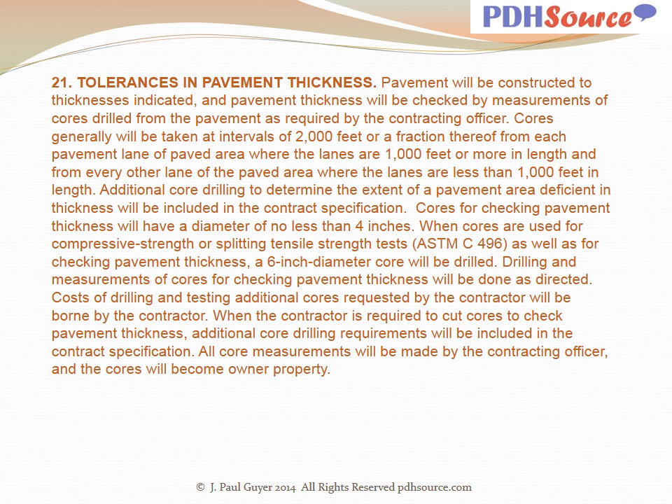With regard to repairs of defective pavement slabs: grooving and sealing or epoxy sealing of random cracks, filling of non-working contraction joints, repairing of spalls along joints and cracks, and removing and replacing of broken slabs that occur in non-reinforced concrete pavements during construction will be accomplished according to the requirements in the contract specification. Areas not meeting smoothness and grade requirements will be repaired or replaced.

High areas can be reduced by rubbing the freshly finished concrete with carborundum brick and water within 36 hours of the concrete placement, or by grinding the surface after it is 36 hours old. Generally, grinding shall not exceed 1/4 inch in depth. The final surface of the repair area must retain the required skid resistance of the surrounding pavement.

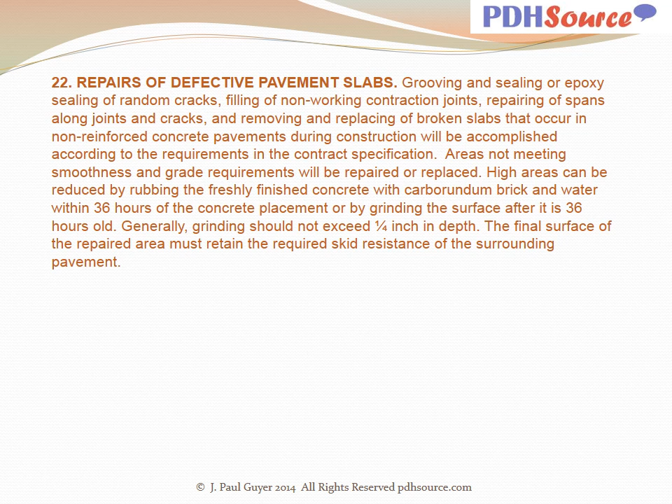With regard to joints, generally, joints are constructed in concrete pavement to permit contraction and expansion of a pavement without irregular cracking, and as a construction expedient to separate the paved area into strips necessary for handling and placing of concrete. There are 3 general types of joints: construction, expansion, and contraction.

With regard to construction joints: first, longitudinal construction joints. These joints formed between paving lanes at the spacing indicated will be either thickened edge, keyed and tied, or doweled. The dimensions of the keyed joint are critical. It is essential that both key dimensions and the location of the key in the joint conform with details on drawings. Key dimensions are based on pavement thickness, with each thickness requiring a different key size.

When stationary forms are used, metal molds for forming the keyway will be securely fastened to the concrete forms so that molds will not be displaced by paving operations. When slip form pavers are used to form keyed joints, the keyway shall be formed by means of preformed metal keyway liners, which are inserted during paving. The metal liners may be shaped as they are fed through the paver from continuous strips, or they may be preformed sections bolted together before insertion through the paver. It is recommended that the metal liners be left in place.

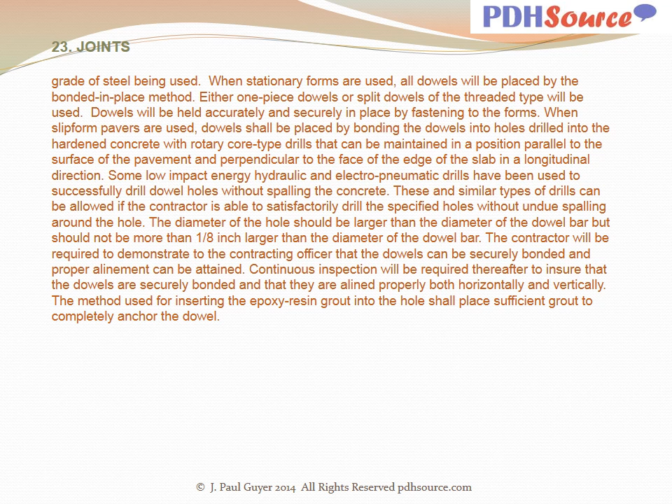In the case of transverse construction joints, when concrete placement is stopped or interrupted for 30 minutes or longer, these joints are installed across the pavement lane. Insofar as practicable, these joints will be installed at the location of a planned joint.

With regard to expansion joints, when expansion joints are required within a pavement, joint assemblies supporting both joint filler and dowels will be installed before placing concrete. Accurate location and alignment of joint filler and dowels are necessary for proper functioning of joints. Since checking of embedded items in joints installed within a paving lane is extremely difficult, it is essential that assemblies used for supporting embedded items be rigidly constructed and capable of resisting all movement and distortion during paving operations.

Great care and continuous inspection are required during placing and finishing of concrete near joints to avoid displacement of joint filler and dowels. Additional hand vibration will be required around the joint assemblies to assure adequate consolidation. The contractor is required to provide a template for checking the position of the dowels.

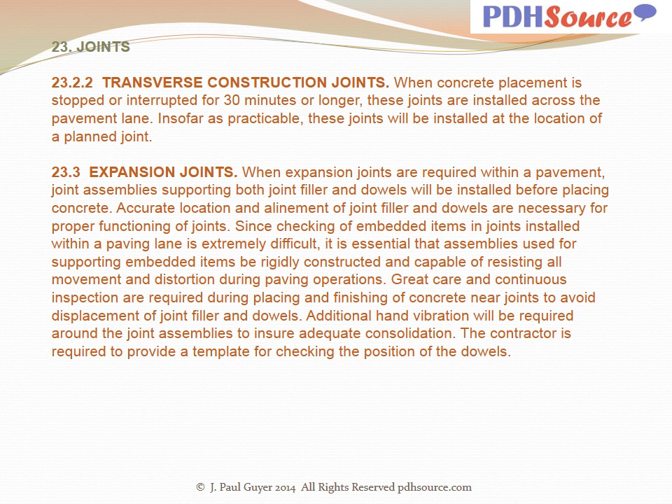With regard to contraction joints, generally contraction joints use a groove to form a weakened plane in the concrete as the concrete undergoes shrinkage. A fracture forms through the concrete below the groove. Load transfer is provided by aggregate interlock in the fracture plane below the joint groove, or by aggregate interlock and dowels.

Where dowels are required across transverse contraction joints, suitable dowel supporting assemblies will be used and care taken to assure proper alignment of dowels in the completed pavement. Requirements for dowel supports have been discussed.

Where tie bars are required in longitudinal contraction joints, suitable supporting devices will be provided for holding tie bars in place during paving operations, or the bars may be installed in front of the paver by insertion into the unconsolidated, freshly placed concrete. The device for inserting the bars shall be mounted on the paver and will automatically insert the bars to the specified depth and at the required spacing.

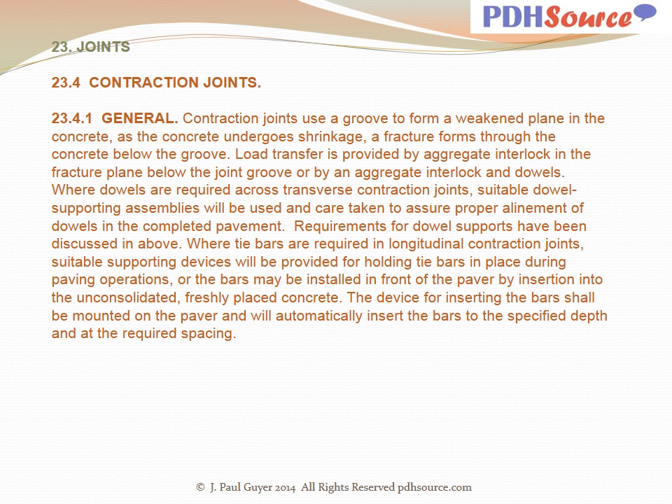With regard to joint types, contraction joints may be constructed by sawing a groove in hardened concrete or installing a suitable insert in freshly placed concrete. Inserts will not be used on airfield pavements without prior approval.

Sawing of joints eliminates manipulation of freshly placed concrete after placement and provides the best conditions for obtaining a smooth surface at the joint. However, sawing time is critical and cracking will occur at the wrong place if the joints are not sawed at the proper time.

The filler type joint forms a weakened plane in the freshly placed concrete, which induces fracturing of concrete at the joint, permits continuous curing of pavement, and provides protection for the joint until removed or depressed in preparation for sealing of joints. Although sawed joints have been used successfully on many projects, excessive cracking has occurred in some instances. This is usually due to delayed sawing.

When sawing cannot be accomplished without undue uncontrolled cracking due to unusual conditions, provisions shall be made for using inserts. Filler type joints may be approved for longitudinal contraction joints when it is demonstrated that these joints can be properly installed with vibratory equipment. The filler must be maintained in a vertical position and in proper alignment in the finished pavement.

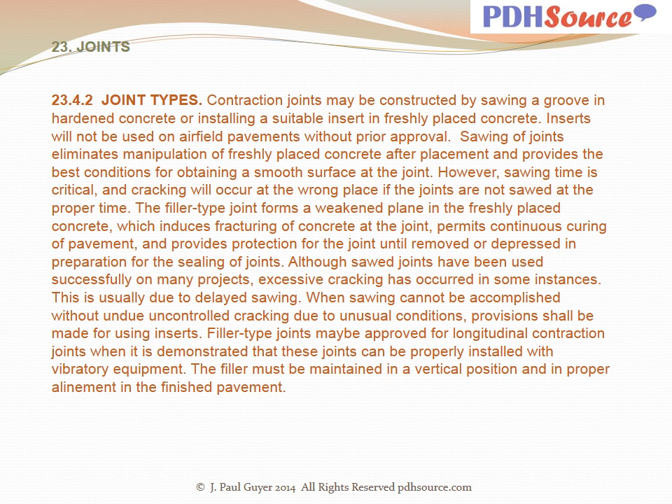With regard to installation, insert type joints will be installed immediately after all machine finishing operations are completed. The machine for installing the insert shall have a vibratory bar that cuts a groove in concrete and simultaneously installs an insert in required locations. The intensity of vibration on the bar will be variable as necessary to form the groove in the freshly mixed concrete and to consolidate the concrete around the insert after it is in place.

Inserts must be the proper depth for the concrete being placed because the load transfer between the slabs depends on the interlock of aggregate below the formed portion of the joint, and material that is not deep enough will not produce cracking at the proper location.

Insert material shall be placed flush with the surface to not more than 1/8 inch below the surface. The surface of the pavement will be finished with a vibratory float. Hand floating will not be permitted.

When finishing concrete after installation of the insert, an excessive amount of fine material must not be worked to the surface adjacent to the insert. Excessive fines will cause scaling of the surface and spalling of the joint.

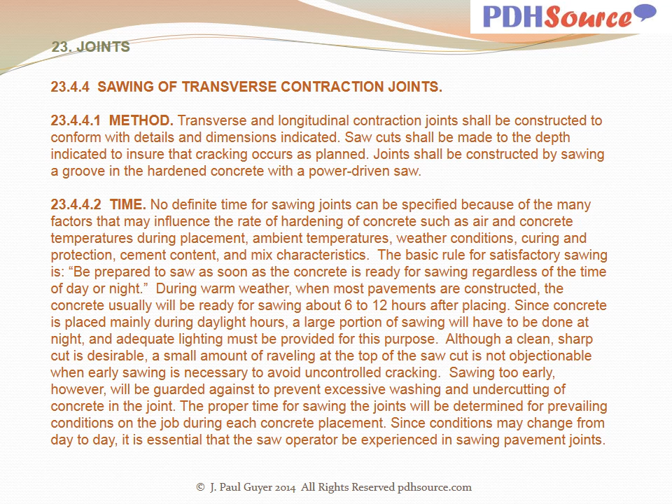Regarding the sequence of sawing: transverse joints will be sawed consecutively in the same sequence as the concrete is placed in the lane. Sawing of alternate joints in the pavement is undesirable because concrete tends to tear away ahead of the saw cut when intermediate joints are sawed. This procedure also reduces the uniformity of fracturing of joints, which may result in excessive opening at some joints.

Before sawing each joint, the concrete will be examined closely for cracks, and the joint will not be sawed if a crack has occurred near it. Sawing will be discontinued at any joint where a crack develops ahead of the saw cut.

All areas of curing compound damaged by the sawing operation will be resprayed. A cord will be placed in the saw cut to retard evaporation of moisture.

The special joint shown in figure 1 for placing new concrete pavement adjacent to old concrete pavement requires special care. The concrete placed under the old pavement must be thoroughly vibrated and must not be placed too rapidly, or air voids will form under the old concrete pavement.

Use of a water reducing admixture to improve workability may be helpful. Proper construction of this joint requires special inspection of construction technique. An alternate method of providing a load transferring joint when abutting old and new concrete pavements is to drill and grout dowel bars into the vertical face of the old pavement.

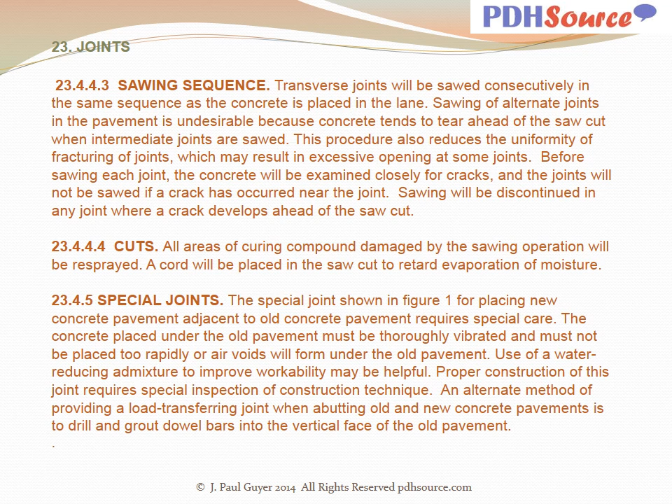Pavement protection is important. All vehicular traffic shall be excluded from the pavement for at least 14 days. As a construction expedient, earlier use of pavement is permitted for operations of construction equipment only as necessary for paving intermediate lanes between newly paved lanes.

Approval for use of the pavement for construction purposes prior to 14 days may be omitted from contract specifications if unnecessary or undesirable for local conditions. Operation of construction equipment on the edge of previously constructed slabs will be permitted only when concrete is more than 72 hours old.

The concrete must have a flexural strength of at least 400 pounds per square inch. In all instances, approval for the use of pavement will be based on adequate provisions for keeping pavements clean and protecting pavements against damage.